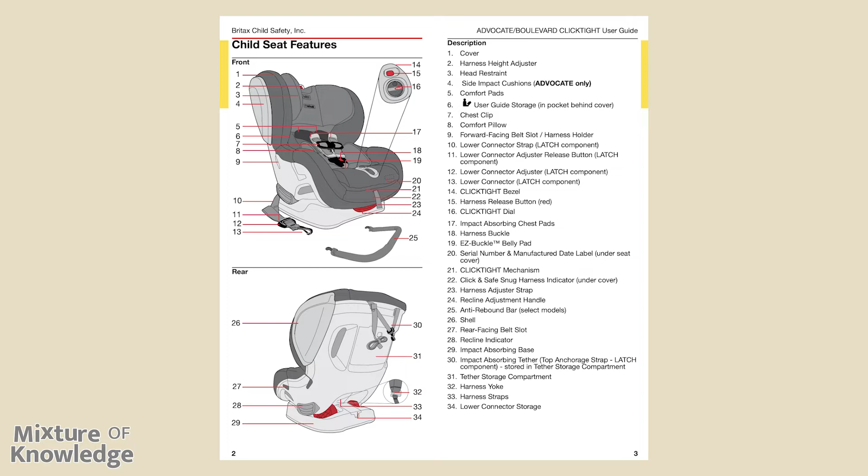Page 2 and 3 are illustrations of the seat front and back and all of the descriptions of 34 items, and you can read through that on your own.

Page 4, safety information, warning. Failure to follow all warnings and instructions could result in serious injury or death. Fit requirements: use only in a rear-facing position when using it with an infant weighing less than 20 pounds. Use only with children who weigh between 5 and 65 pounds and whose height is 49 inches or less. Use rear-facing for children who weigh between 5 and 40 pounds. Use forward-facing for children who weigh between 20 and 65 pounds. Snugly adjust the belts provided with this child restraint around your child.

Installation. Secure the top anchorage strap provided with this child restraint. Secure this child restraint with the vehicle's child restraint anchorage system if available, or with a vehicle belt. Use the buckle slot closest to but not underneath your child when installing the child seat.

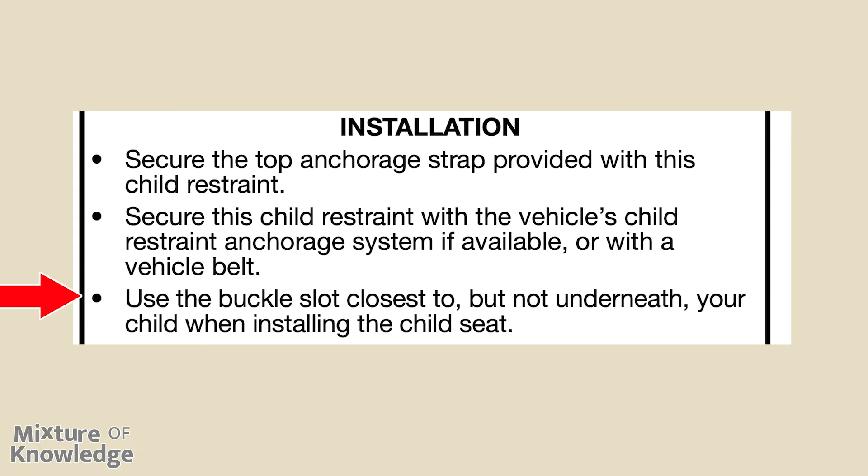General usage. Follow all instructions on this child restraint and in the written instructions. Register your child restraint with the manufacturer. In a vehicle with rear designated seating positions, vehicle owners should be alerted that, according to accident statistics, children are safer when properly restrained in the rear seating positions than in the front seating positions.

To ensure your child's safety, please study vehicle seating positions on page 33 and consult your vehicle owner's manual. Always make sure the child restraint system is secured to the vehicle even when unoccupied, since in a crash, an unsecured child restraint system may injure occupants.

To prevent injury due to deterioration or hidden damage, discontinue use of this child seat if it is older than 10 years or has been in a moderate or severe crash. See serial number and manufactured date label on child seat, page 2 to 3. The use of non-Britax covers, inserts, toys, accessories, or tightening devices is not approved by Britax.

Their use could cause this child seat not to perform as intended in a crash. Advocate only: prevent the side impact cushions from being punctured. Punctured damage will cause the cushions not to perform as intended in a crash.

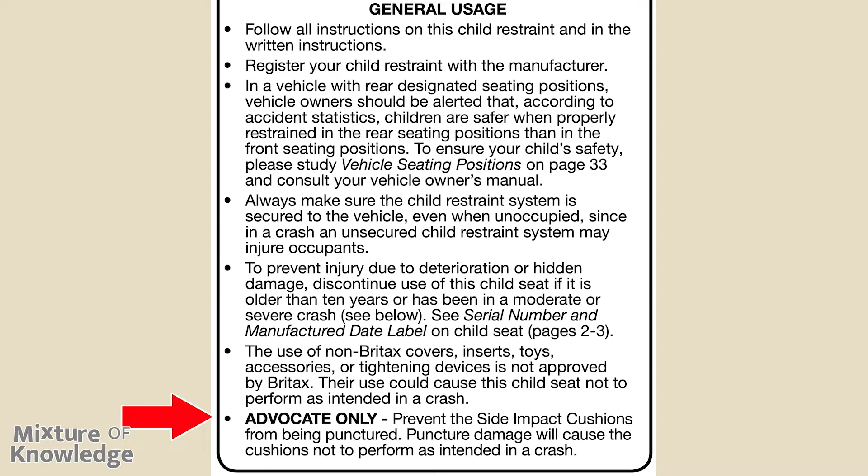Page 5. Important notes. Do not install with the lower anchors for a child weighing more than Advocate model 30 pounds rear facing or 35 pounds forward facing. Boulevard: 35 pounds rear facing or 40 pounds forward facing. Do not use the top tether strap with rear facing installations.

Ensure that the shell cover is properly secured behind the red markers to allow for proper functioning of the CLICKTIGHT mechanism. See page 37. Discontinue use of this child seat if it has been in a moderate or severe crash.

It is not necessary to replace a car seat after a minor crash, defined by the U.S. National Highway Traffic Safety Administration as: A, the vehicle is drivable from the crash site; B, the vehicle door nearest the child seat was not damaged; C, no vehicle occupants were injured; D, there is no visible damage to the child seat; and E, the airbags, if present, did not deploy.

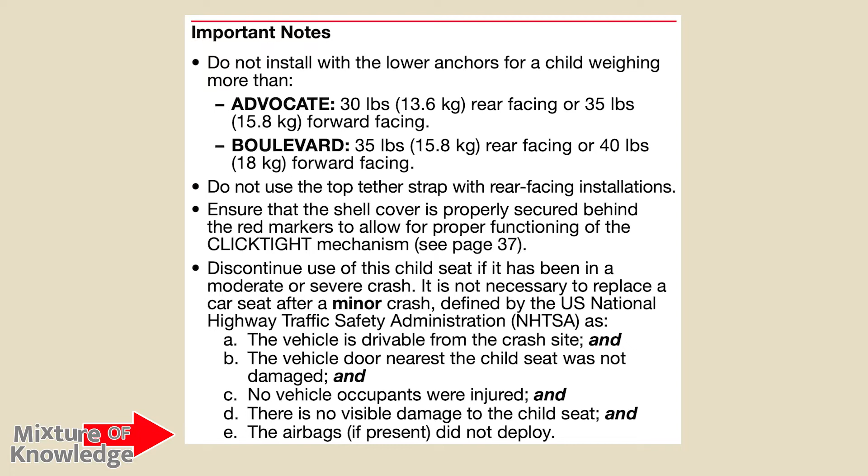Cover the child seat when the vehicle is parked in direct sunlight. Metal parts of the child seat could become hot enough to burn a child. Store the child seat in a safe place when it is not being used. Avoid placing heavy objects on top of it.

Do not, except as described in this booklet, attempt to disassemble any part of the child seat or change the way the harness or vehicle seat belts are used. Never use the harness adjuster strap to lift or carry this child seat.

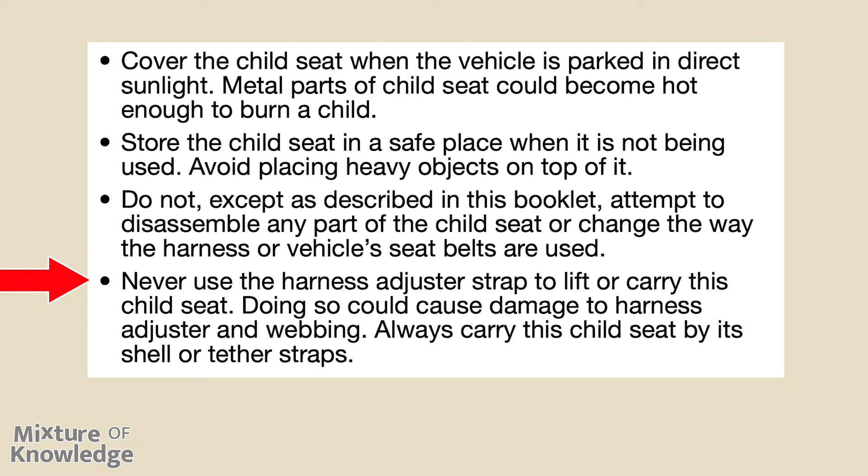Doing so could cause damage to the harness, adjuster, and webbing. Always carry this child seat by its shell or tether straps.

Registration. Child restraints could be recalled for safety reasons. You must register this restraint to be reached in a recall. Send your name, address, email address if available, and the restraint's model number and manufacturing date to the following location.

Certification. This restraint is certified for use in motor vehicles and aircraft. This child seat system conforms to all applicable federal motor vehicle safety standards and is certified for aircraft use. The FAA recommends that a child weighing up to 40 pounds use a certified harnessed child seat while traveling on an aircraft. Contact the airline about their policy prior to traveling.

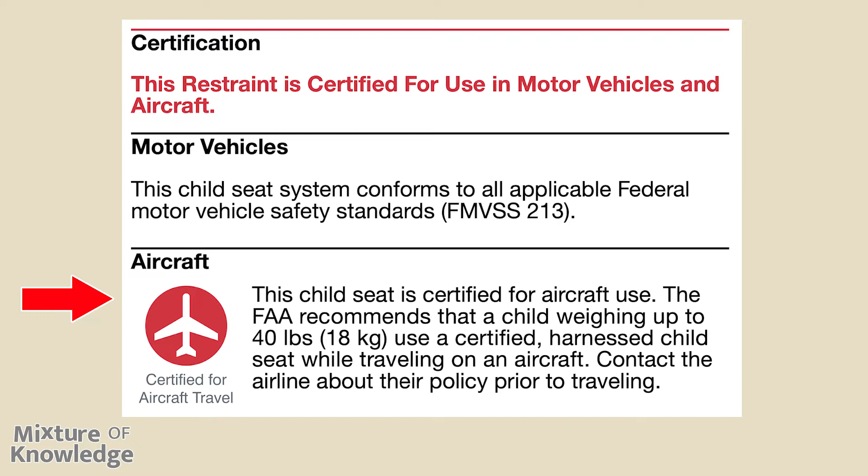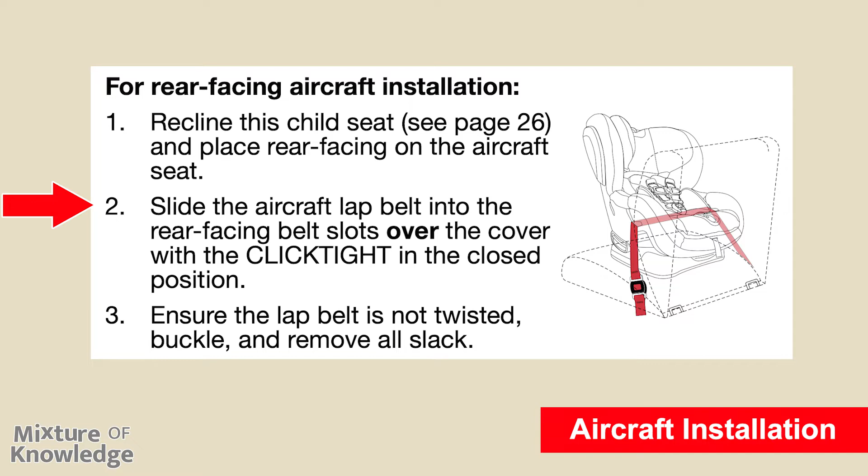For rear-facing aircraft installation: 1. Recline this child seat and place rear-facing on the aircraft seat. 2. Slide the aircraft lap belt into the rear-facing belt slots over the cover with the CLICKTIGHT in the closed position. Ensure the lap belt is not twisted, buckle, and remove all slack.

For forward-facing aircraft installation: 1. Place this child seat forward-facing on the aircraft seat in the upright position. 2. Slide the aircraft lap belt into the forward-facing belt slots under the cover with the CLICKTIGHT in the closed position. 3. Ensure the lap belt is not twisted, buckle, and remove all slack.

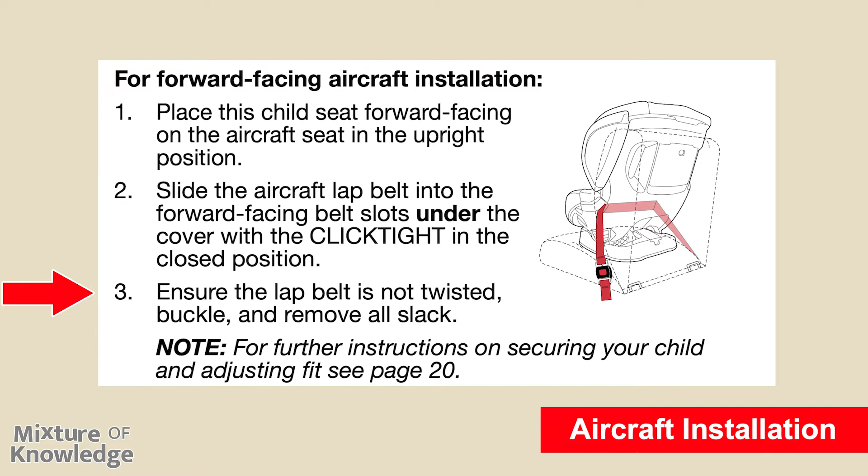Note: for further instructions on securing your child and adjusting fit, see page 20. Install your child seat in a window seat to avoid blocking the aisle. If the aircraft lap belt is too short, ask a flight attendant for a belt extender. Your child may experience discomfort if the buckle is located in the seating area of the child seat after installation.

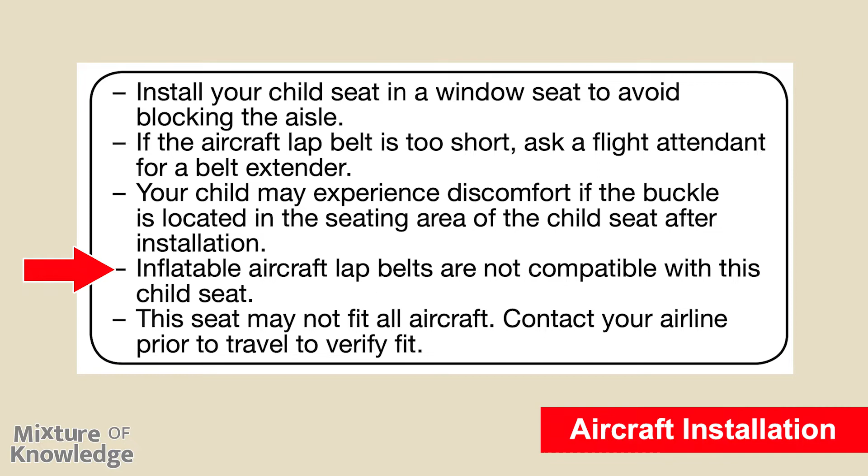Inflatable aircraft lap belts are not compatible with this child seat. This seat may not fit all aircraft. Contact your airline prior to travel to verify fit.

Child fit information. Rear facing, 5 to 40 pounds. The American Academy of Pediatrics recommends that all infants and toddlers should ride in a rear-facing car seat until they are 2 years of age or until they reach the highest weight or height allowed by their car seat manufacturer. Britax strongly recommends that children ride rear-facing to the highest weight or height specified.

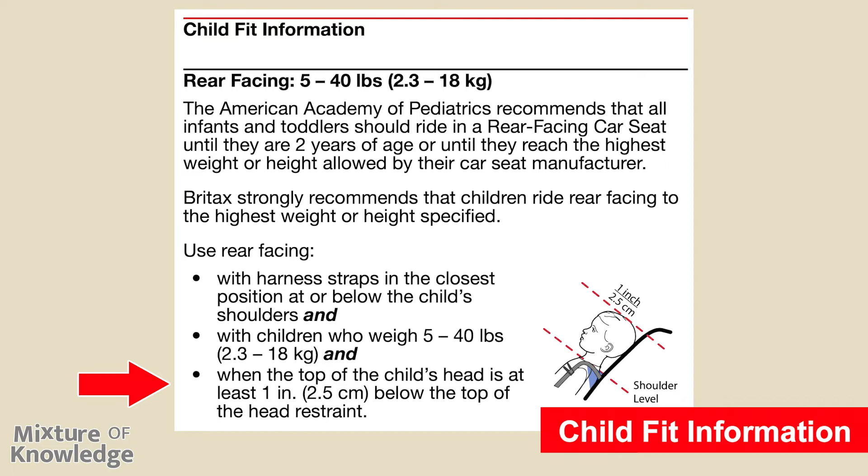Use rear-facing with harness straps in the closest position at or below the child's shoulders, with children who weigh 5 to 40 pounds, and when the top of the child's head is at least 1 inch below the top of the head restraint. Forward-facing, 20 to 65 pounds.

Britax strongly recommends that children should be secured with a harness system until they exceed the weight or height limit specified. Use forward-facing with harness straps in the closest position at or above the child's shoulders, parallel to level ground, with children who weigh 20 to 65 pounds and who are 49 inches or less in height, and when the top of the ears are below the top of the head restraint.

Rear-facing installation. Lap shoulder belt installation, preferred method. 1. Open the CLICKTIGHT: A. Press the dimple on the CLICKTIGHT dial. B. Rotate dial clockwise until CLICKTIGHT releases and lift to open.

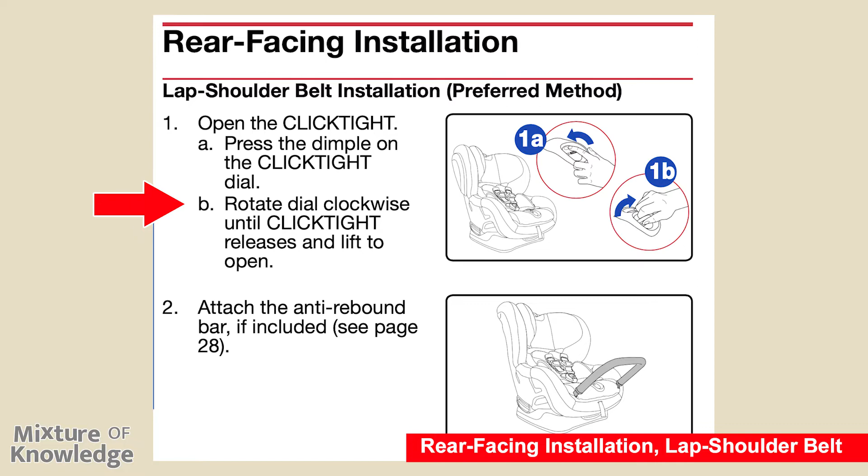2. Attach the anti-rebound bar if included. 3. Recline the unoccupied child seat and place rear-facing on the vehicle seat. Ensure that no more than 3 inches of the base hangs over the edge of the vehicle seat.

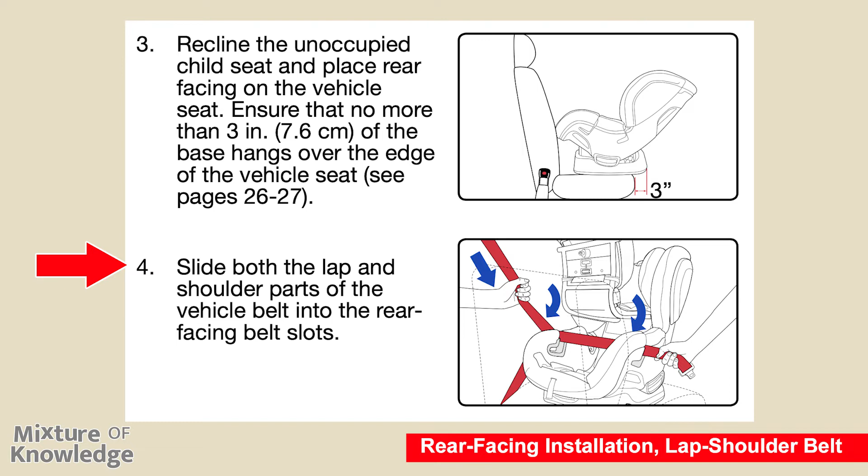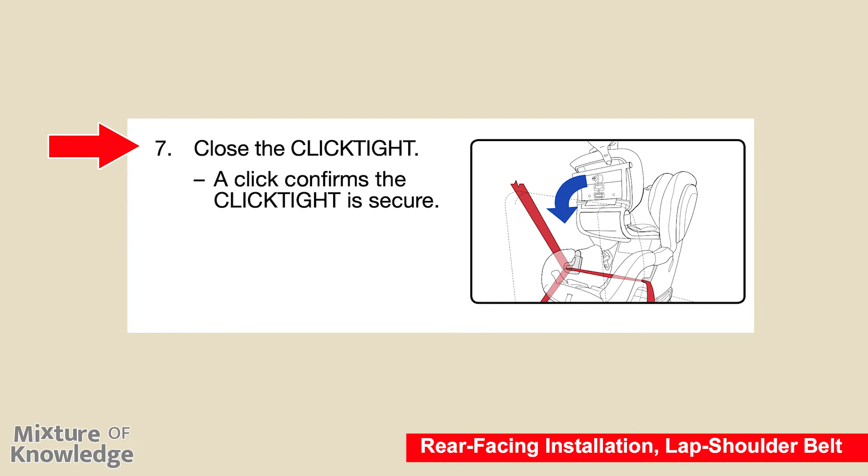4. Slide both the lap and shoulder parts of the vehicle belt into the rear-facing belt slots. 5. Ensure the vehicle belt is not twisted and buckle the seat belt. 6. Remove slack from the lap part A, then shoulder part B of the vehicle belt. 7. Close the CLICKTIGHT. A click confirms the CLICKTIGHT is secure.

Rear-facing installation with lap shoulder belt checklist: Ensure that the logo on the CLICKTIGHT dial has returned to a horizontal position. Ensure that the recline indicator ball is within the allowed blue section for the size of the child and that no more than 3 inches of the base hangs over the edge of the vehicle seat.

Check that all connections are secure and straps are not twisted. Check that the child seat cannot be moved front to back or side to side more than 1 inch at the belt path. If the child seat is not secure, repeat installation or use a different seating location.

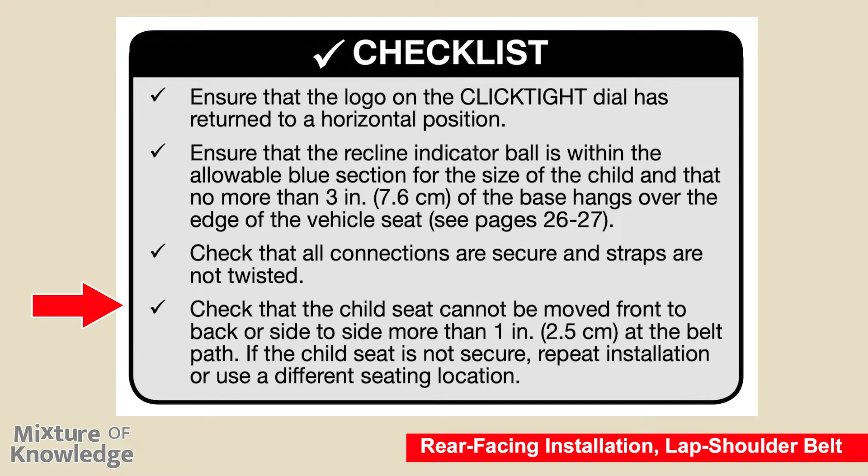Lower anchor installation. Important: do not install rear-facing with lower anchors for a child weighing more than 30 pounds for the Advocate, or 35 pounds for the Boulevard. 1. Open the CLICKTIGHT.

Press the dimple on the CLICKTIGHT dial. Rotate dial clockwise until CLICKTIGHT releases and lift to open.

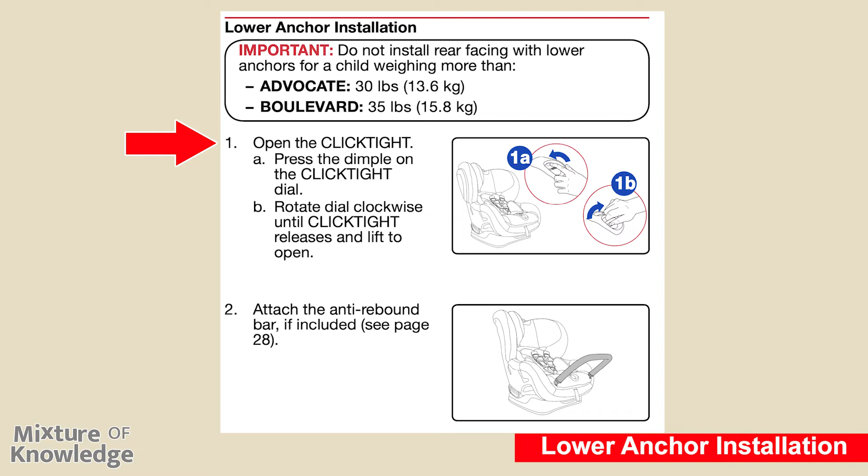Attach the anti-rebound bar if included. Recline the unoccupied child seat and place rear-facing on the vehicle seat. Ensure that no more than 3 inches of the base hangs over the edge of the vehicle seat.

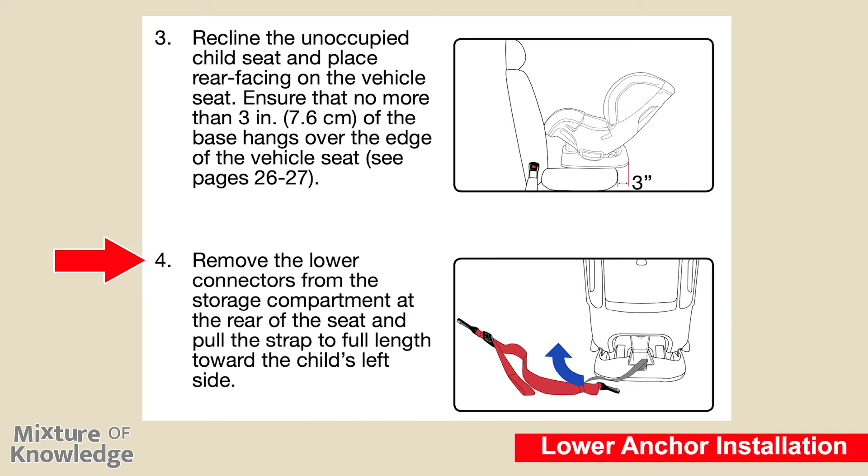Remove the lower connectors from the storage compartment at the rear of the seat and pull the strap to full length toward the child's left side.

Slide the lower connector strap into the rear-facing belt slots and firmly press the lower connectors over their adjacent lower anchors. Verify that the connectors are secure and the strap is not twisted.

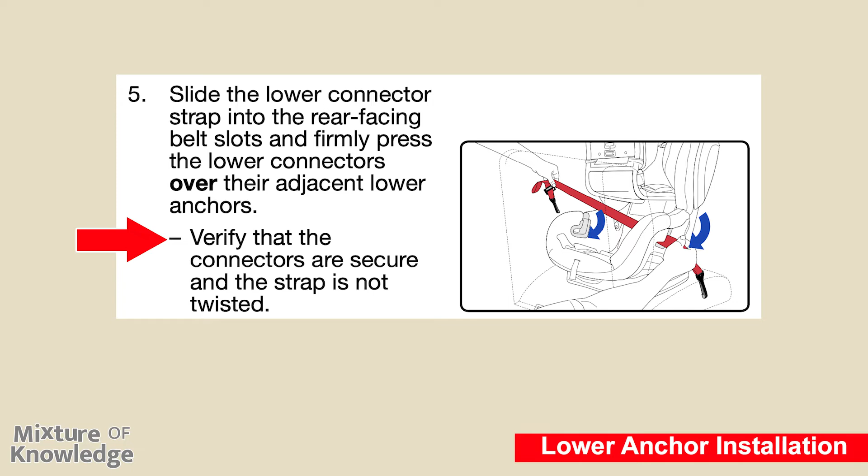Pull the end of the lower connector strap to remove slack. Close the CLICKTIGHT. A click confirms the CLICKTIGHT is secure.

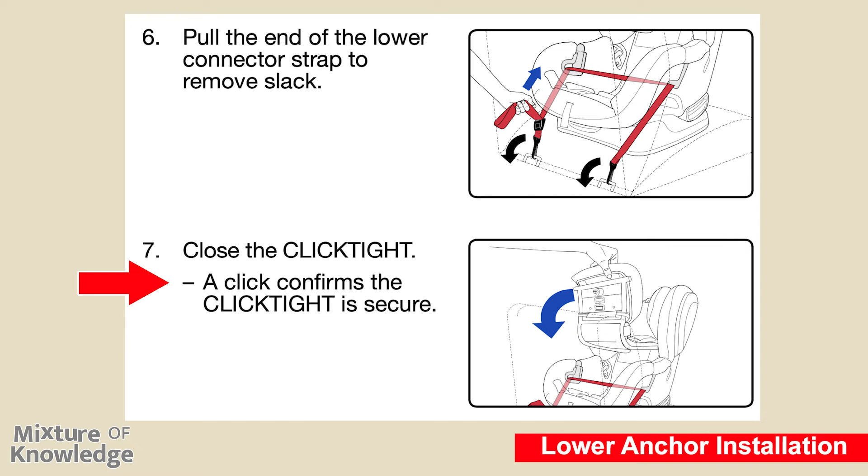Rear facing installation with lower anchors.

Checklist. Ensure that the logo on the CLICKTIGHT dial has returned to a horizontal position. Ensure that the recline indicator ball is within the allowable blue section for the size of the child and that no more than 3 inches of the base hangs over the edge of the vehicle seat.

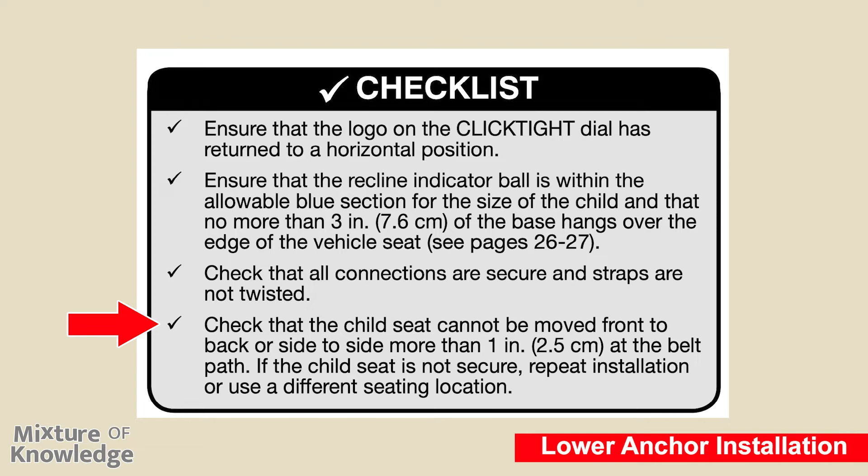Check that all connections are secure and straps are not twisted. Check that the child's seat cannot be moved from front to back or side to side more than 1 inch at the belt path. If the child's seat is not secure, repeat installation or use a different seating location.

Lap belt installation. Open the CLICKTIGHT. Press the dimple on the CLICKTIGHT dial. Rotate dial clockwise until CLICKTIGHT releases and lift to open.

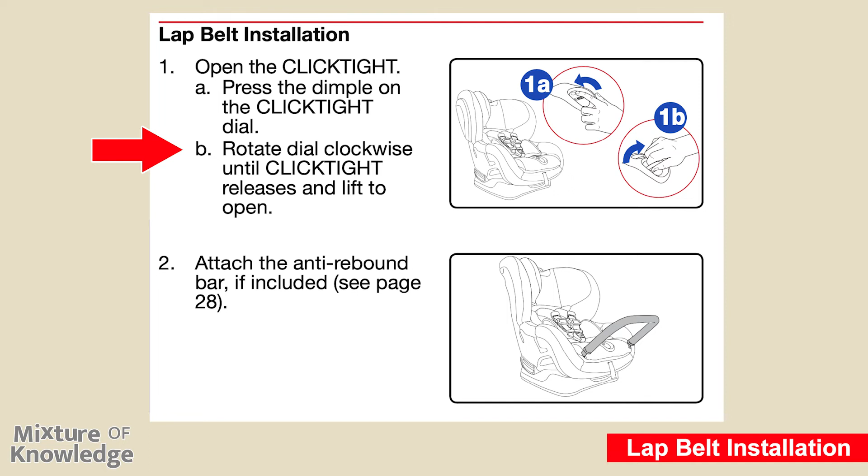Attach the anti-rebound bar if included. Recline the unoccupied child's seat and place rear facing on the vehicle seat. Ensure that no more than 3 inches of the base hangs over the edge of the vehicle seat.

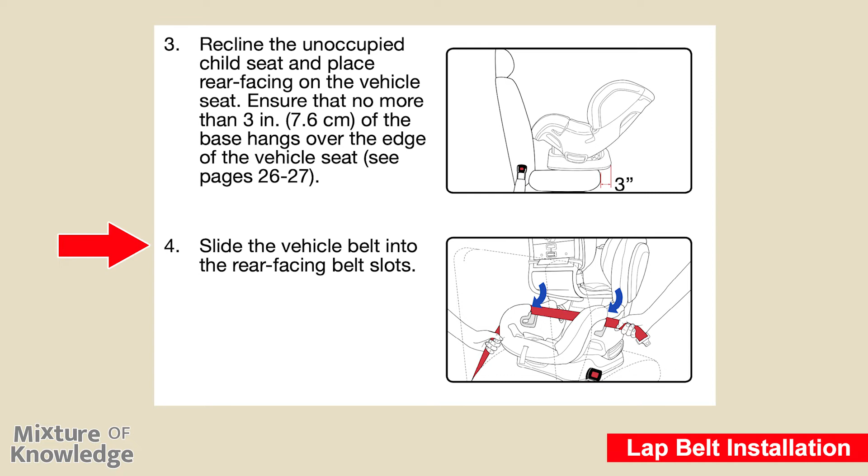Slide the vehicle belt into the rear facing belt slots. Ensure the vehicle belt is not twisted and buckle seat belt.

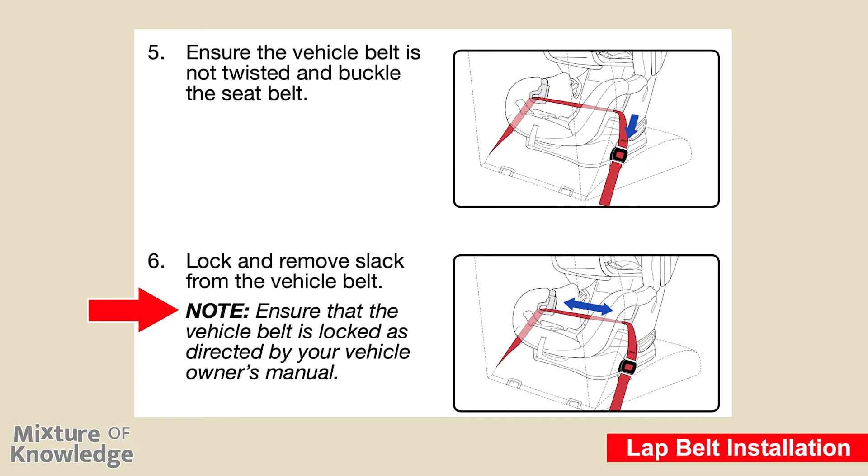Lock and remove slack from the vehicle belt. Note: ensure that the vehicle belt is locked as directed by your vehicle owner's manual.

Close the CLICKTIGHT. A click confirms the click tight is secure. Rear facing installation with lap belt.

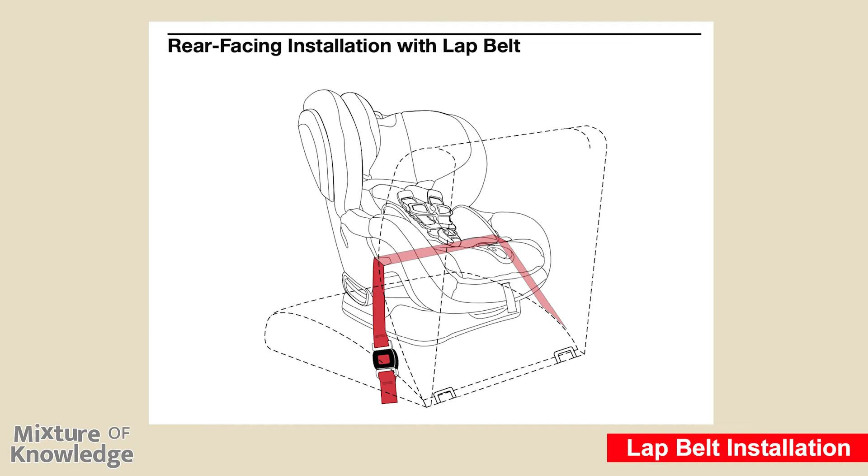Checklist. Ensure that the logo on the CLICKTIGHT dial has returned to a horizontal position. Ensure that the recline indicator ball is within the allowable blue section for the size of the child and that no more than 3 inches of the base hangs over the edge of the vehicle seat.

Check that all connections are secure and straps are not twisted. Check that the child's seat cannot be moved front to back or side to side more than 1 inch at the belt path. If the child's seat is not secure, repeat installation or use a different seating location.

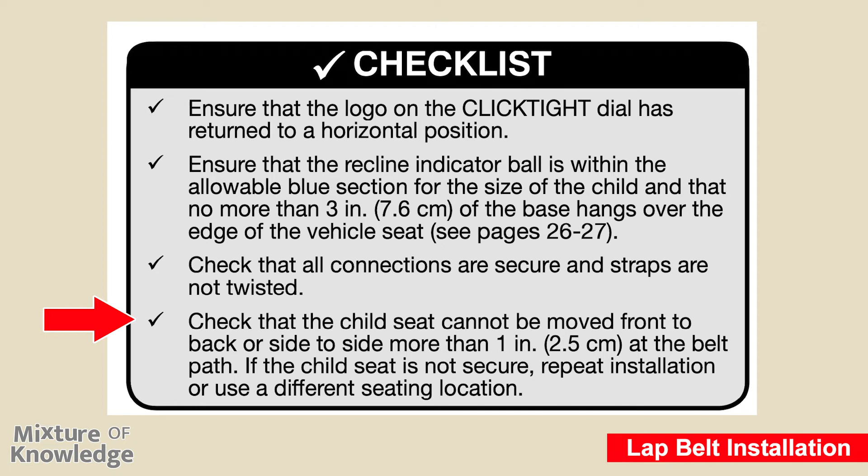Forward-facing installation. Lap shoulder belt installation is the preferred method. Remove the tether from the tether storage compartment and retainer tabs and place it up and over the child's seat back. Recline the unoccupied child seat and place forward facing on the vehicle seat.

Ensure that the base of the child's seat is flat on the vehicle seat and no more than 3 inches of the base hangs over the edge of the vehicle seat.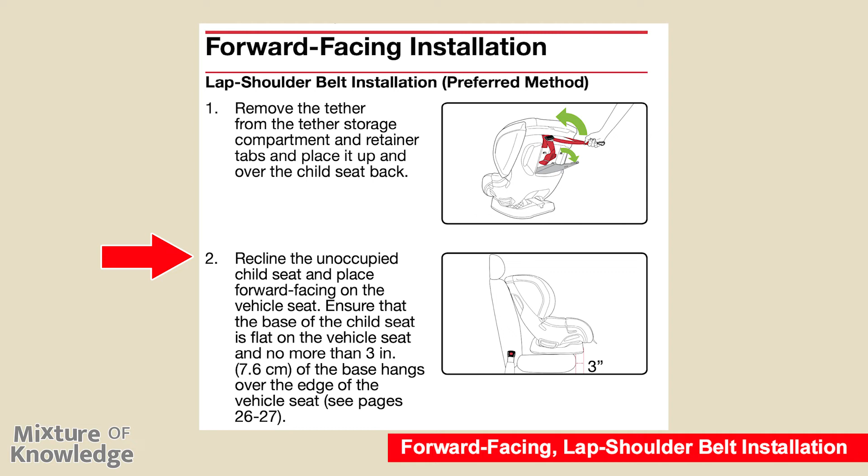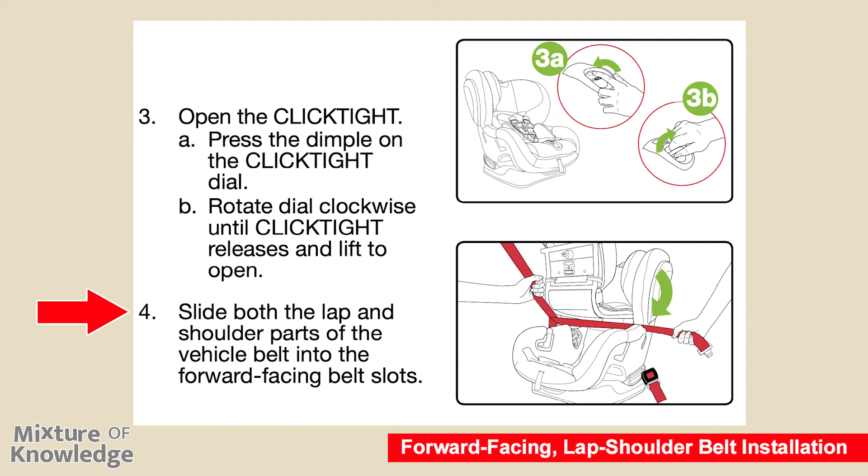Slide both the lap and shoulder parts of the vehicle belt into the forward-facing belt slots. Ensure the vehicle belt is not twisted and buckle the seat belt. Remove slack from the lap part A, then the shoulder part B of the vehicle belt.

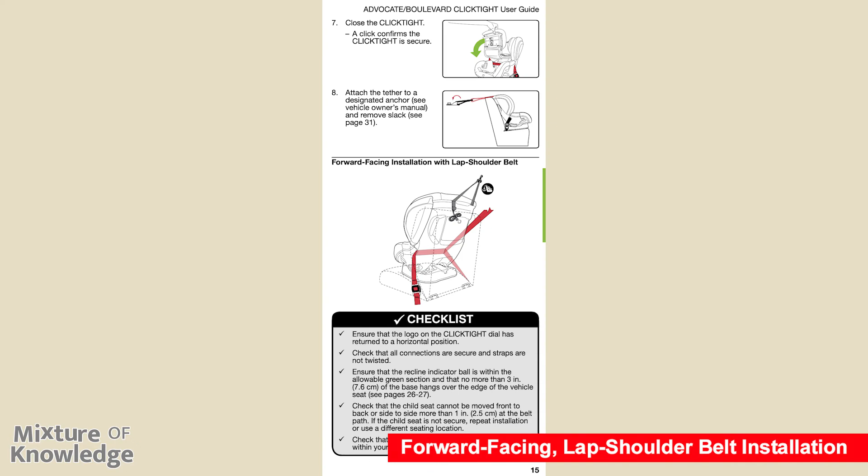Close the CLICKTIGHT. A click confirms the CLICKTIGHT is secure. Attach the tether to a designated anchor.

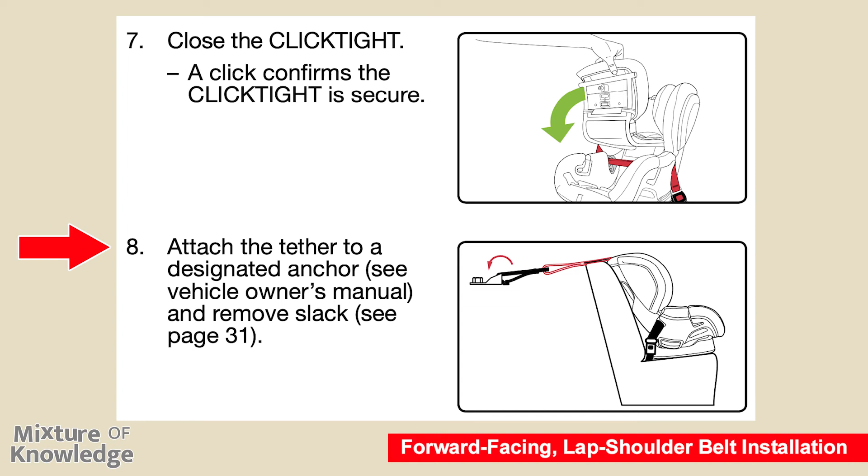See vehicle's owner's manual and remove slack. And here is the forward-facing installation with lap shoulder belt.

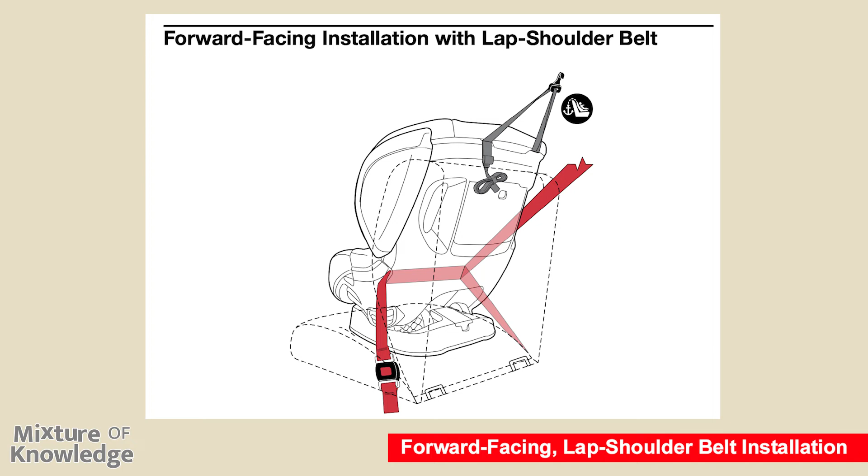Checklist. Ensure that the logo on the click tight dial has returned to a horizontal position. Check that all connections are secure and straps are not twisted.

Ensure that the recline indicator ball is within the allowable green section and that no more than 3 inches of the base hangs over the edge of the vehicle seat. Check that the child's seat cannot be moved front to back or side to side more than 1 inch at the belt path.

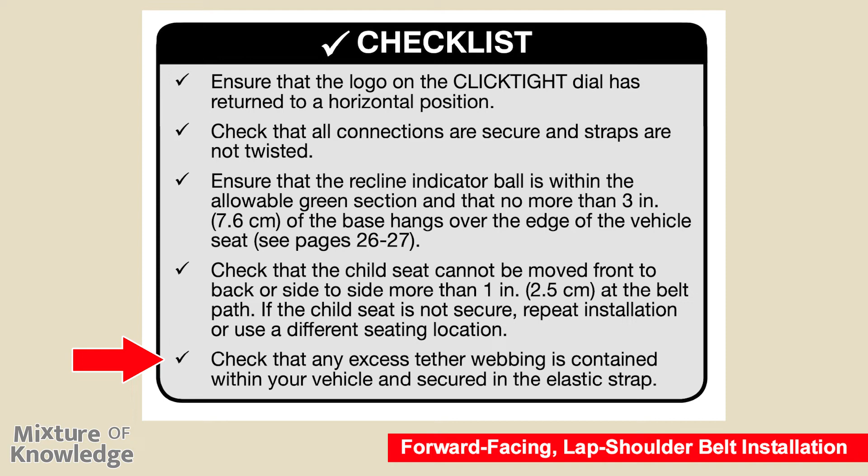If the child's seat is not secure, repeat installation or use a different seating location. Check that any excess tether webbing is contained within your vehicle and secured in the elastic strap.

Page 16, lower anchor installation. Important: do not install forward facing with lower anchors for a child weighing more than, for the Advocate, 35 pounds, for the Boulevard, 40 pounds.

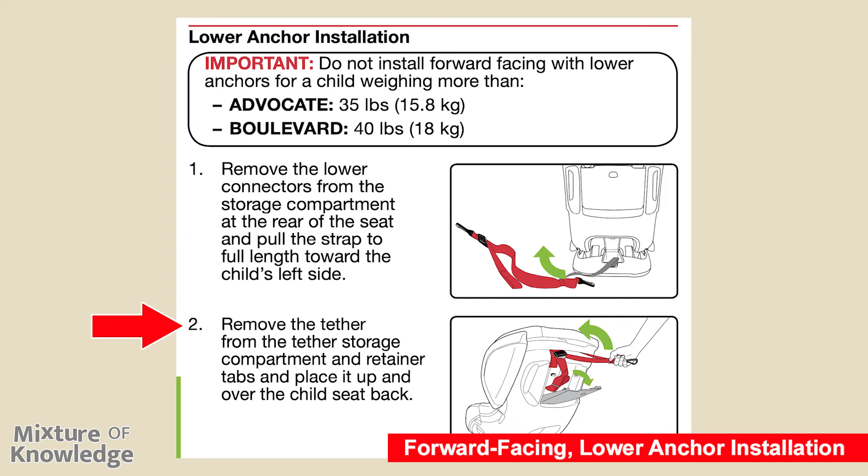1. Remove the lower connectors from the storage compartment at the rear of the seat and pull the strap to full length toward the child's left side. 2. Remove the tether from the tether storage compartment and retainer tabs and place it up and over the child's seat back. 3. Recline the unoccupied child's seat and place forward facing on the vehicle seat.

Ensure that the base of the child's seat is flat on the vehicle seat and no more than 3 inches of the base hangs over the edge of the vehicle seat. See pages 26 and 27.

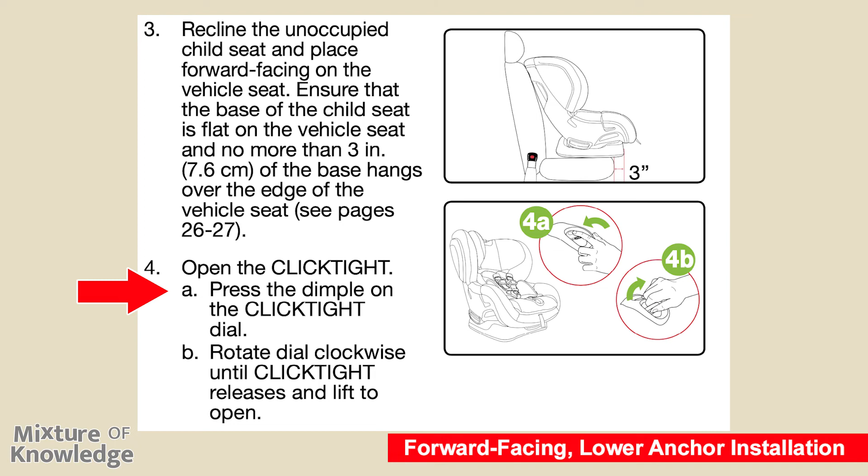4. Open the CLICKTIGHT. Press the dimple on the CLICKTIGHT dial. Rotate dial clockwise until CLICKTIGHT releases and lift to open.

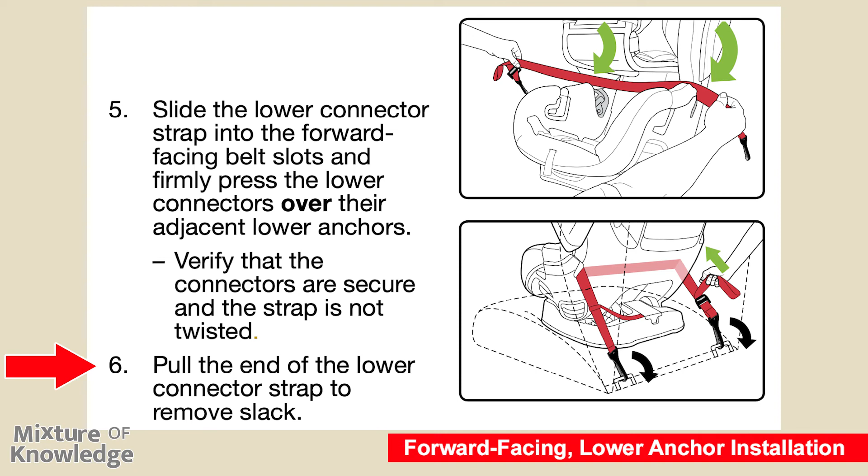Slide the lower connector strap into the forward-facing belt slots and firmly press the lower connectors over their adjacent lower anchors. Verify that the connectors are secure and the strap is not twisted. 6. Pull the end of the lower connector strap to remove slack.

Page 17. 7. Close the CLICKTIGHT. A click confirms the CLICKTIGHT is secure.

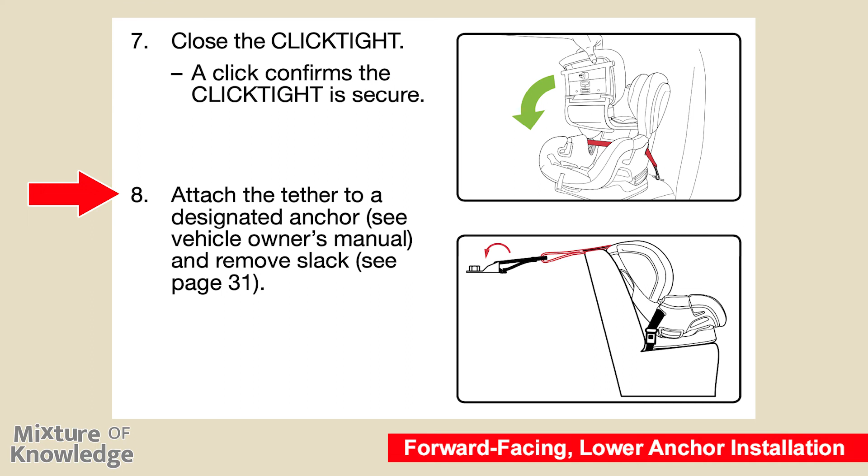8. Attach the tether to a designated anchor, see Vehicle's Owner's Manual, and remove slack, see page 31. And here is the forward-facing installation with lower anchors.

Checklist. Ensure that the logo on the CLICKTIGHT dial has returned to a horizontal position. Check that all connections are secure and straps are not twisted. Ensure that the recline indicator ball is within the allowable green section and that no more than 3 inches of

the base hangs over the edge of the vehicle seat. See pages 26 to 27. Check that the child seat cannot be moved front to back or side to side more than 1 inch at

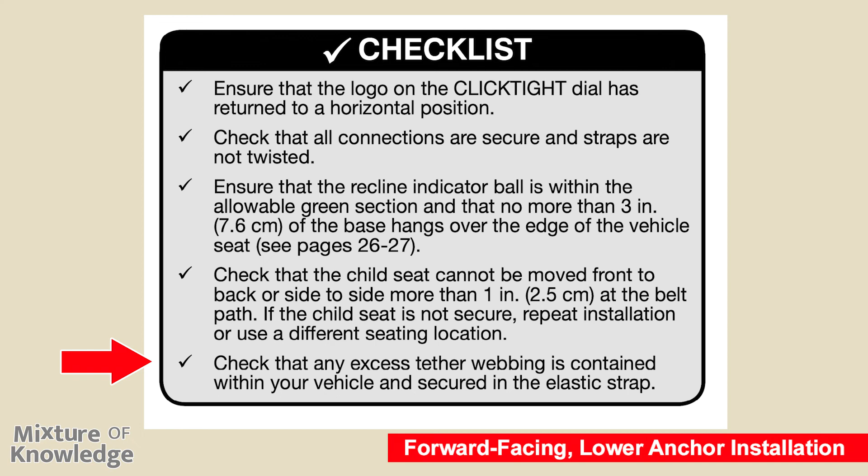the belt path. If the child's seat is not secure, repeat installation or use a different seating location. Check that any excess tether webbing is contained within your vehicle and secured in the elastic strap.

Page 18, lap belt installation. 1. Remove the tether from the tether storage compartment and retainer tabs and place it up and over the child's seat back. 2. Recline the unoccupied child seat and place forward facing on the vehicle seat.

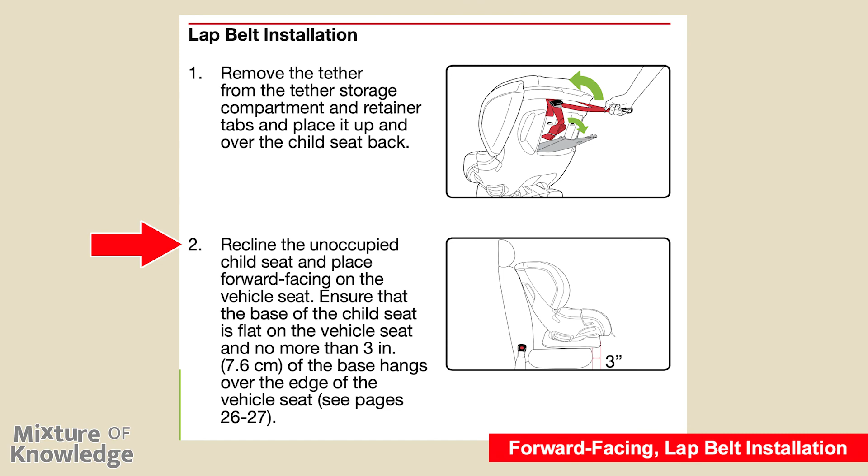Ensure that the base of the child seat is flat on the vehicle seat and no more than 3 inches of the base hangs over the edge of the vehicle seat. See pages 26 to 27.

3. Open the CLICKTIGHT. Press the dimple on the CLICKTIGHT dial. Rotate dial clockwise until CLICKTIGHT releases and lift to open.

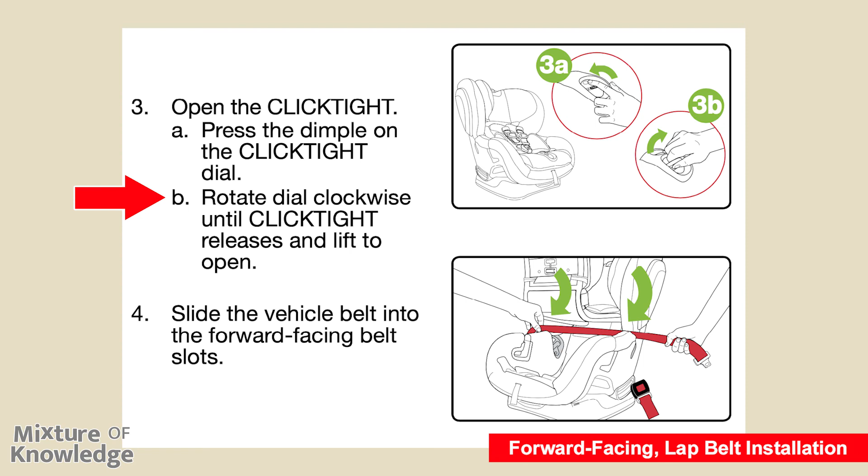4. Slide the vehicle belt into the forward-facing belt slots. 5. Ensure the vehicle belt is not twisted and buckle the seat belt. 6. Push down into the middle of the child seating area with moderate force, approximately 45 pounds, compressing the vehicle seat while tightening the vehicle belt.

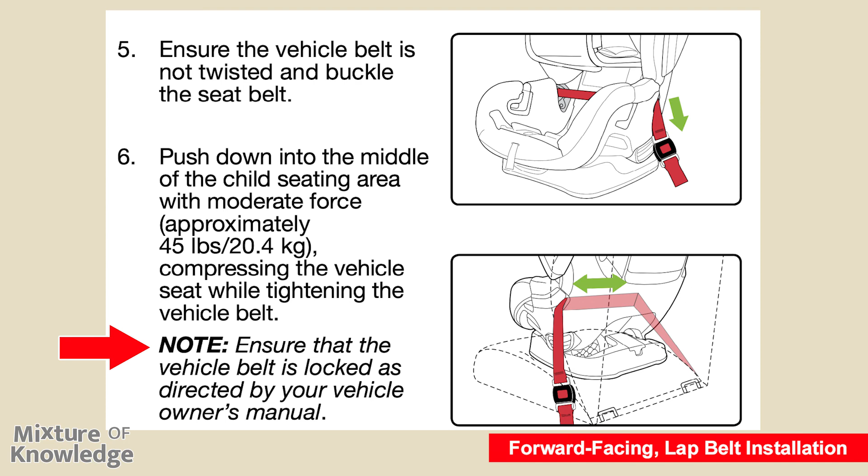Note: ensure that the vehicle belt is locked as directed by your vehicle owner's manual. Page 19. 7. Close the CLICKTIGHT. A click confirms the CLICKTIGHT is secure.

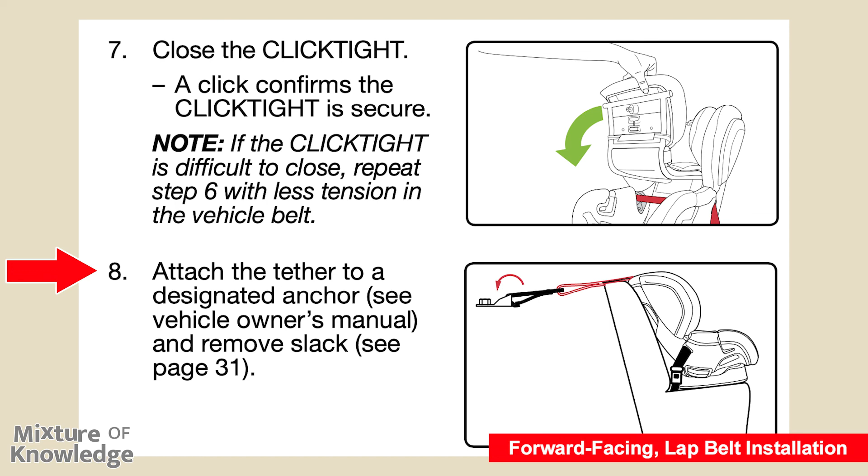Note: if the CLICKTIGHT is difficult to close, repeat step 6 with less tension in the vehicle belt. 8. Attach the tether to a designated anchor, see Vehicle Owner's Manual, and remove slack, see page 31.

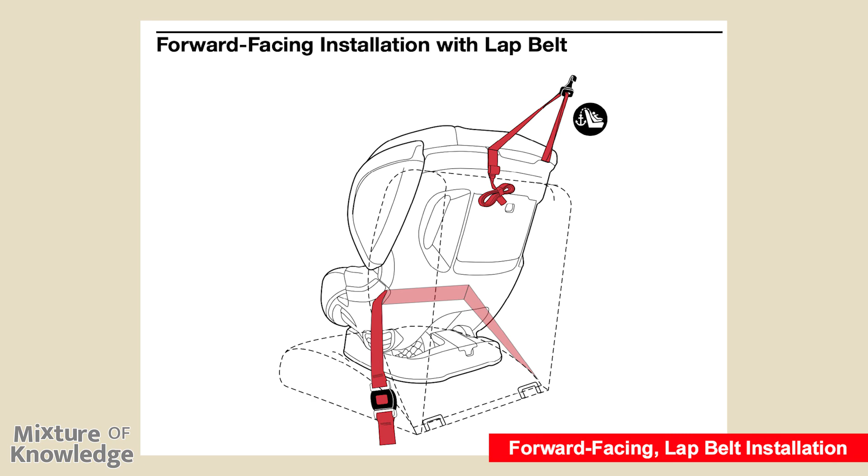And here is the forward-facing installation with lap belt. Checklist. Ensure that the logo on the CLICKTIGHT dial has returned to a horizontal position. Check that all connections are secure and straps are not twisted.

Ensure that the recline indicator ball is within the allowable green section and that no more than 3 inches of the base hangs over the edge of the vehicle seat. See pages 26 to 27.

Check that the child seat cannot be moved front to back or side to side more than 1 inch at the belt path. If the child seat is not secure, repeat installation or use a different seating location. Check that any excess tether webbing is contained within your vehicle and secured in the elastic strap.

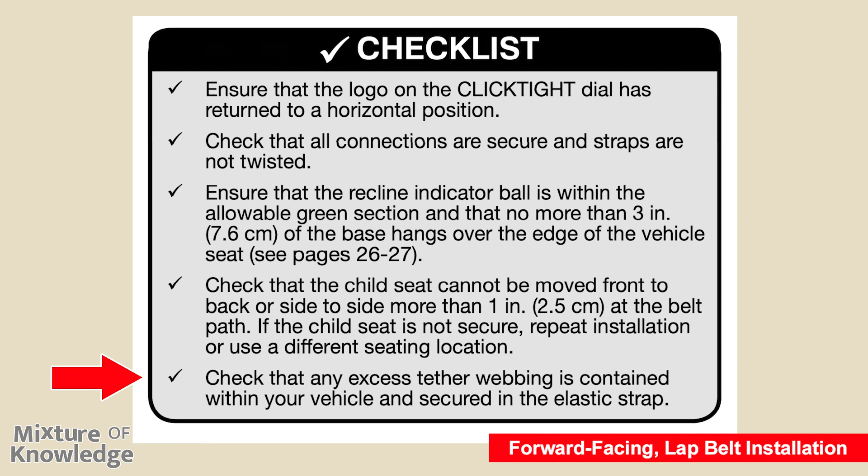We've now covered up to page 19 for the seat installation in the different configurations. This is part 1, and check out my other video, part 2, beginning on page 20 with securing your child and child seat functions.